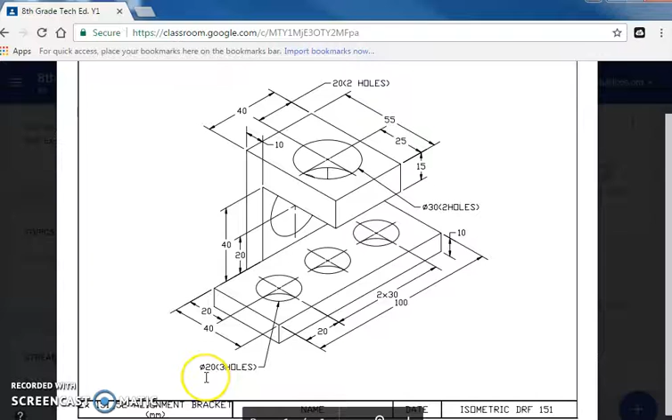Let's take a minute and look at this. It says the width of the rectangle is 40 millimeters, the overall length is 100 millimeters, the height is 10, and it has 3 holes cut through it. Each hole has a diameter of 20 millimeters. The holes are exactly 20 millimeters from the edge on both sides, and it says 2 times 30, meaning the distance between these two center points is 30, and between these two centers is also 30. So for this circle overall, it'd be 20 from that edge and 50 from this edge over here.

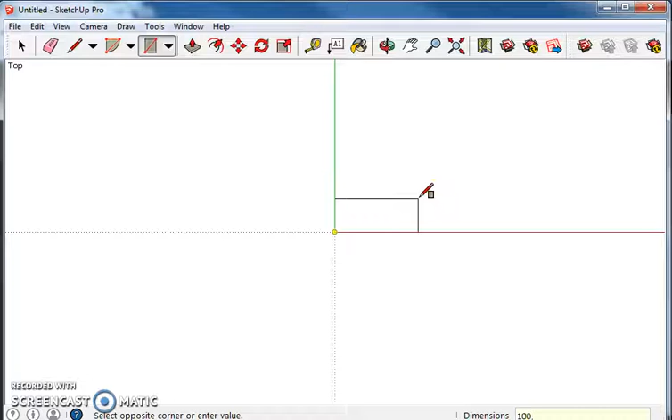Let's go ahead and see if we can draw that. I'm going to select the rectangle tool and go 100, 40. That is the bottom of the alignment bracket. Select Zoom Extents. Orbit into a view that you feel comfortable with. Click, and it's 10 millimeters thick.

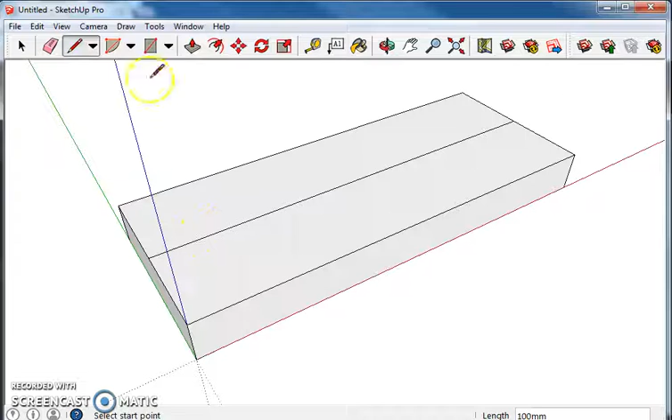Now I'm going to use a construction line here, just to line my circles up, and I'll delete it later. Secondly, I'll use the measuring tape. From the edge to the middle, we know that's 50 millimeters, so I'll put a circle right there, and I'm going to make this - the diameter is 20, but SketchUp asks for a radius, so the radius should be 10.

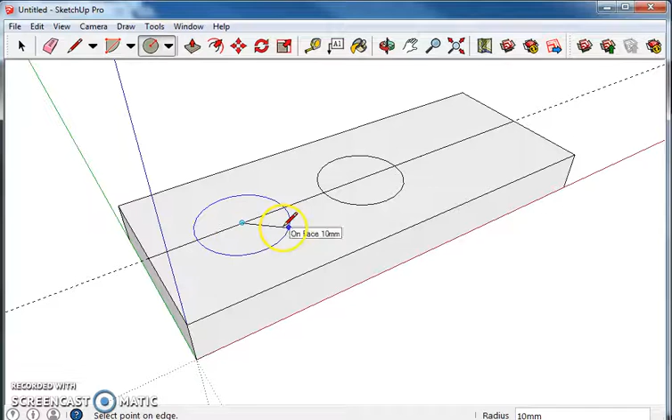I'll take the tape measure again, and 20 millimeters from the edge is exactly where I want this circle. 10. And I'll do the same thing on this side - 20 millimeters. Now I don't need this line anymore - that was just to help me construct my circles, so I can delete all of those.

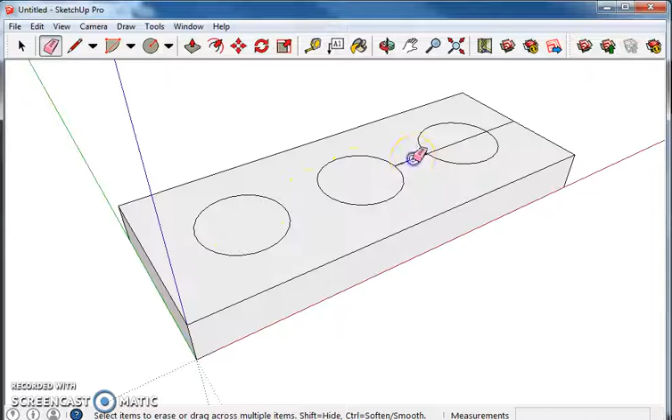And now I can select these and push them through. Alright, so now the bottom of the alignment bracket is finished.

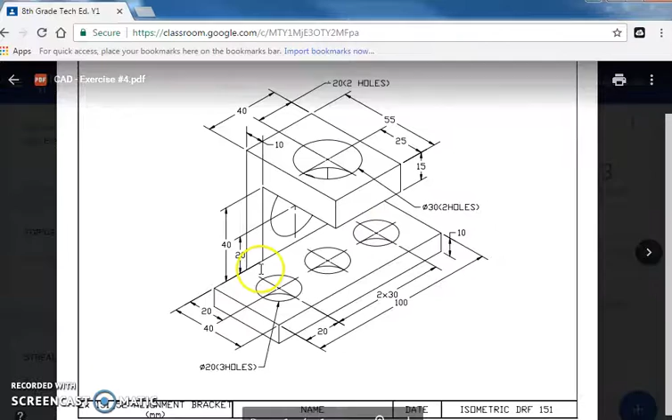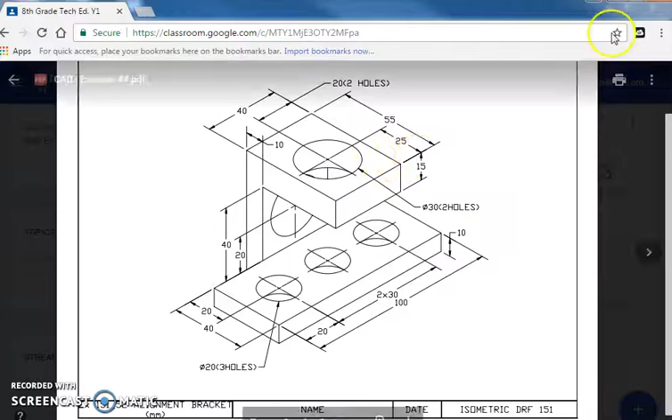The next thing I want to do is draw this rectangle in the back, then pull this rectangle off of it. You'll notice it says the distance between right here and this point is 40 millimeters. However, we can also notice that it goes down behind this bottom rectangle, and since we know this is 10 thick, it's going to be 50 millimeters from the bottom of the entire shape to here, plus an additional 15 to the top, which I got from this dimension right here. So that's a total of 65 millimeters tall, and the shape is 40 millimeters wide.

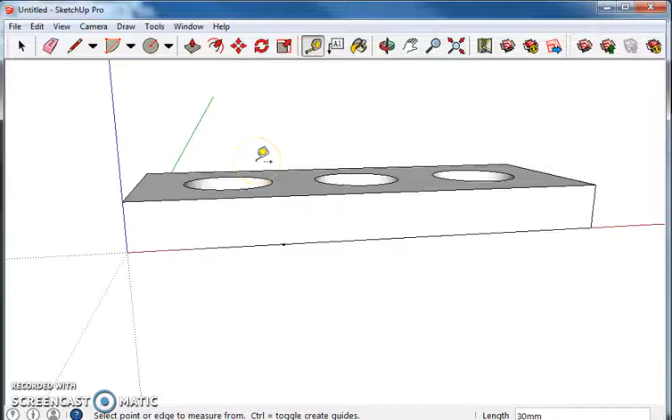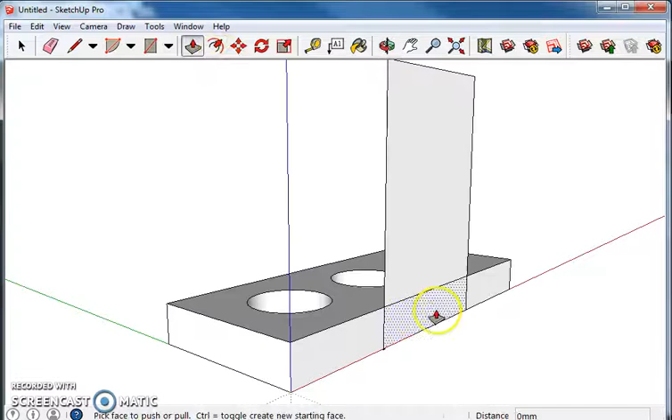Let's go ahead and see if we can draw that. I'm going to go to the back of my shape, and I'll start this at 30 millimeters, because to space this out equally on both sides, I'd need 30 millimeters on both sides. I'm going to start my rectangle right there, and do 65, 40. That gets pulled out 10 millimeters, and I'll show you where I got that when we go back to the drawing. I'll erase those lines.

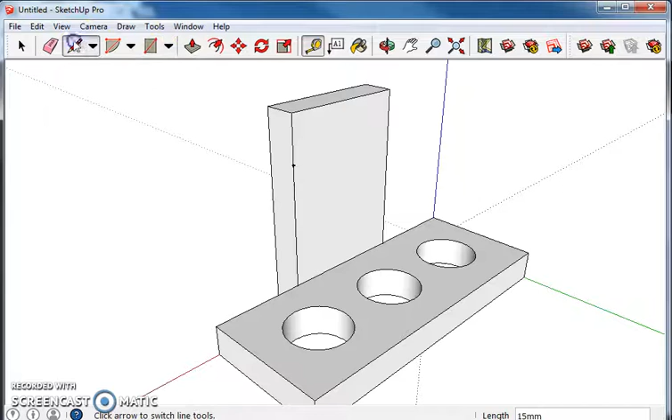Now I'm going to measure down 15 millimeters for this - 15, tape measure, go across - and let's look at this again to see how far we have to pull that out. Alright, so I've drawn this rectangle right here, and I said I pulled it out 10 millimeters, and I got that dimension from right here.

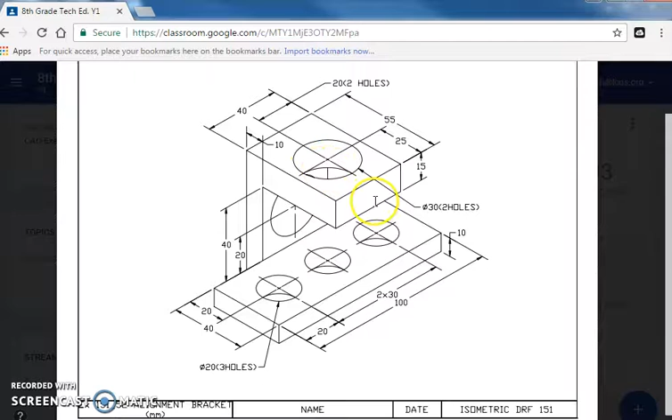And now I'm pulling this - what you see is this rectangle right here. I just drew that on the surface, and I'm going to pull it out. It says the overall is 55, but I'm pulling it off of a surface that's already 10 millimeters thick, so I'm going to extrude it 45 millimeters. 45, enter. And now the last thing I want to do is put those 2 holes in.

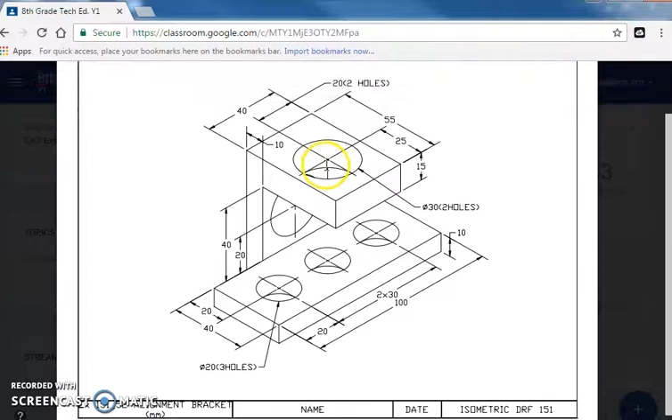You really have to look at this because it can be a little bit tricky. It says the diameter of 2 holes - there's only 2 holes left that we didn't draw - and they're 30 millimeters, 25 back from the front, and it should be 20 millimeters from this edge right here. So let's see if we can draw that.

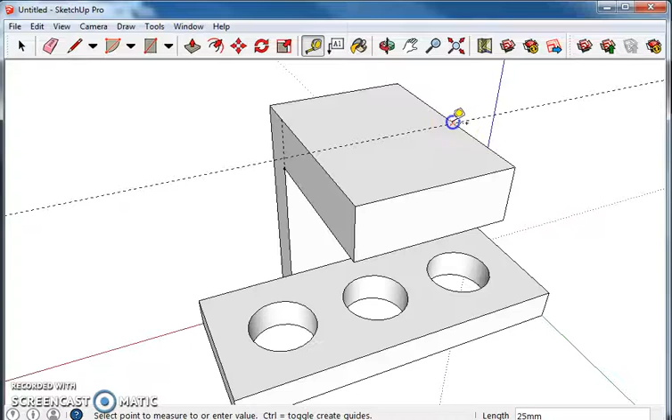I'm going to take the tape measuring tool, go right to the center, measure back 25, and 20 from the edge. So right there, I'll put a circle, and the radius for this will be 15. Cut that through. Okay, now I have one more hole right here that we need to do.

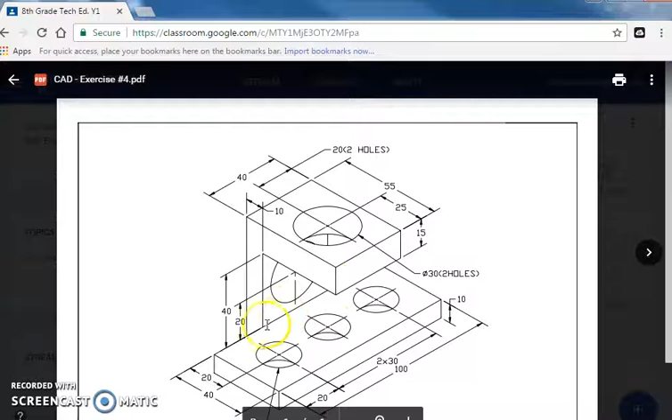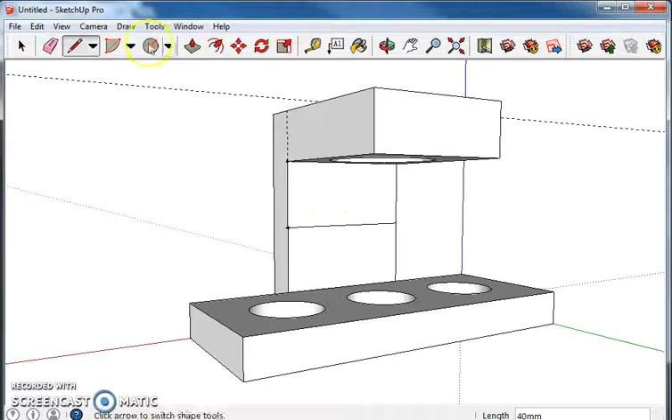Same thing - it's just 20 millimeters up from this surface, and it has a diameter of 30. Let's go ahead and draw a construction line across there, and we know we need to be 20 from the edge.

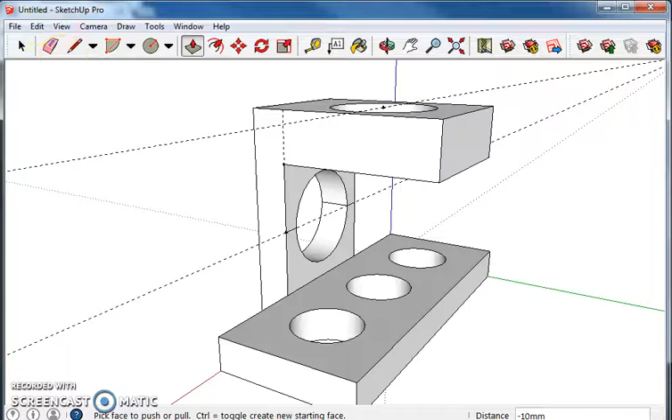Alright, the last thing I have to do is cut this out. And I'll get rid of the guidelines - I can delete some of these unnecessary lines. And it's complete.